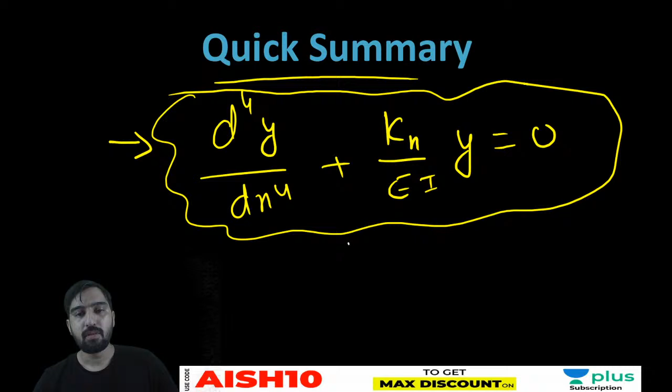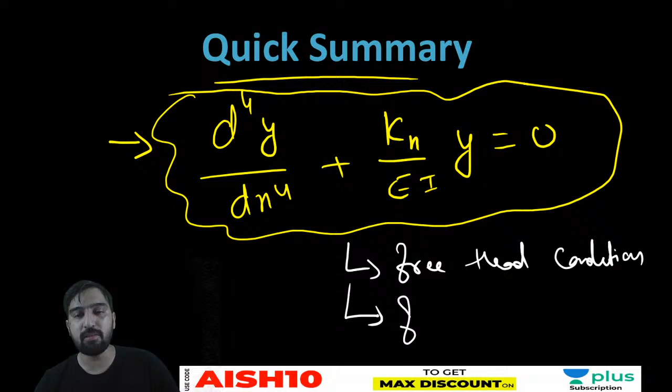What are the cases? We have to discuss two cases. First, free head condition, which I covered yesterday in quite a detailed way, slowly. And the second one is fixed head condition. So my target is to cover these two in today's session.

Okay, yes, so it is like that. So today I am going to start from this differential equation and the solution to this differential equation, which is obtained from the strength of material concept.

The solution to this differential equation is going to tell you all the things about the pile, like deflection, slope, bending, shear, reaction. So all these things you can obtain by using this. It is KH, so both the notations are used, KH as well as KS. So I will use KH from now onwards.

Okay, yes Shashi, tomorrow you can enjoy my structure lesson, don't worry. Okay, so Rupinder ji, we are doing well, you tell me.

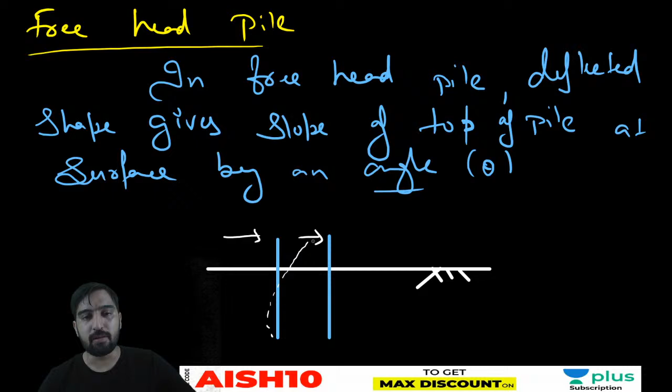As you can see here, deflection is there, and along with that you will also be having some slope, let's say theta. Okay, so this is a case which we want to analyze. Is it clear? Okay, so how we are going to analyze it, we have to see that.

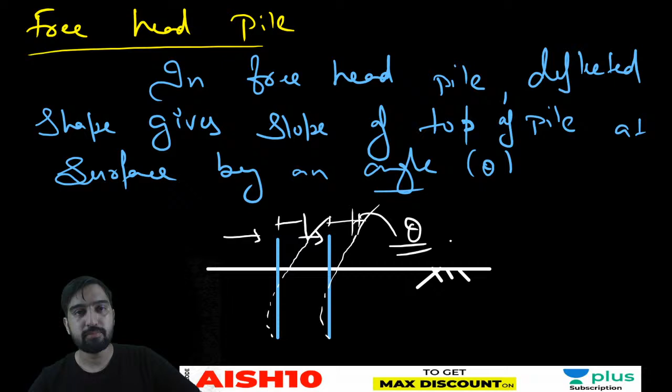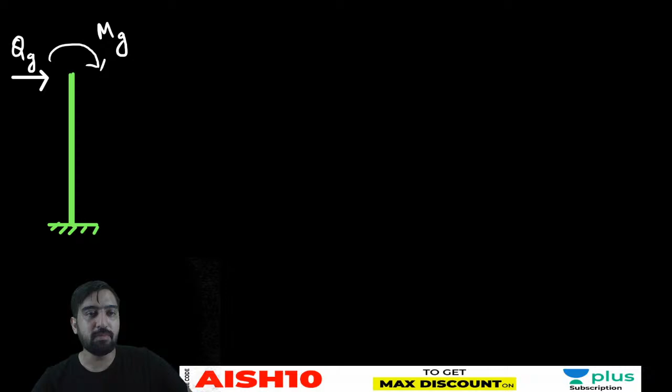So we will use the principle of superposition. Suppose this is my pile, which may be subjected to lateral load and moment. Let me call this moment as Mg and this lateral load as Qg. Okay, and this is ground level, so I cannot keep it fixed, let's say it is ground level.

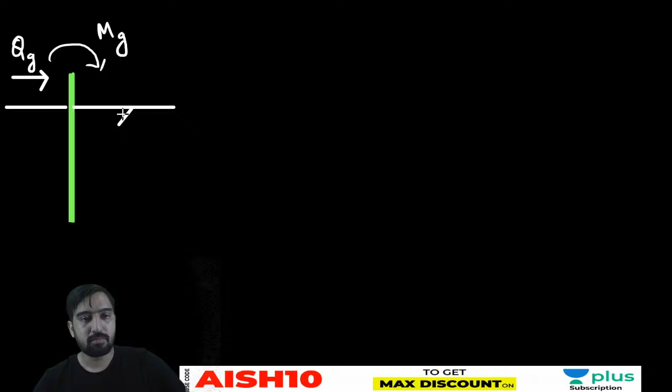So my dear friends, what I'm going to do here is break this loading into two components. First one, I'm going to tackle only lateral load, and in the second case, I'm going to show only this moment. This moment may have originated from the axial loading due to the eccentricity of the axial loading. So what I'm going to do here is simply divide this configuration into two parts. Okay, let me show them one by one.

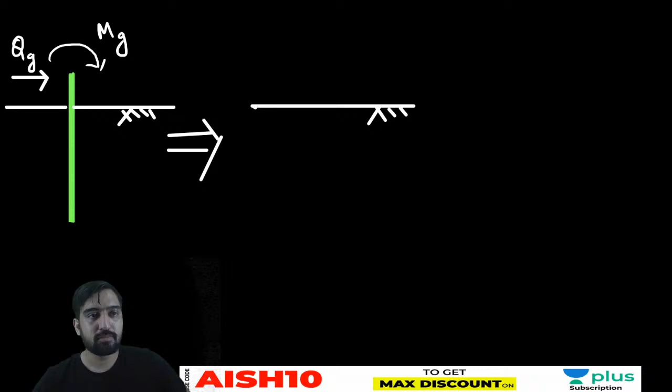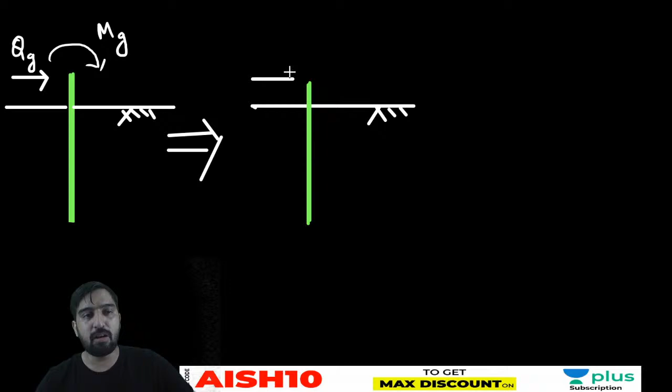So first portion is this one, in which only lateral loads are considered. Okay, and second, plus second component is this one, where only moments are considered.

Is it clear, my dear friends? So second portion is going to have only moment, and let's say it is Mg.

Okay, so now what is the principle of superposition saying? The principle of superposition says whether I'm going to take both of these forces together, or consider them independently and then add them, both are going to give the same result in an elastic material. And it is our assumption that the pile is long, and a long pile will be considered as an elastic pile. And these deformations are considered small in comparison to the dimension of the pile.

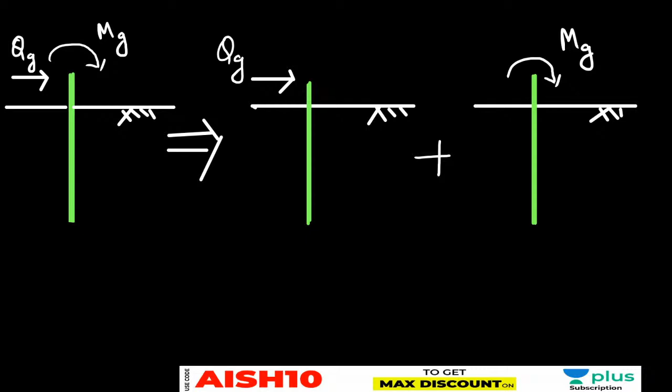Okay, so now what I want to tell you, if you want to know the deflection here, let's try to understand this thing. Suppose you need this deflection, let me call it y. So this is the combination of this one and this one.

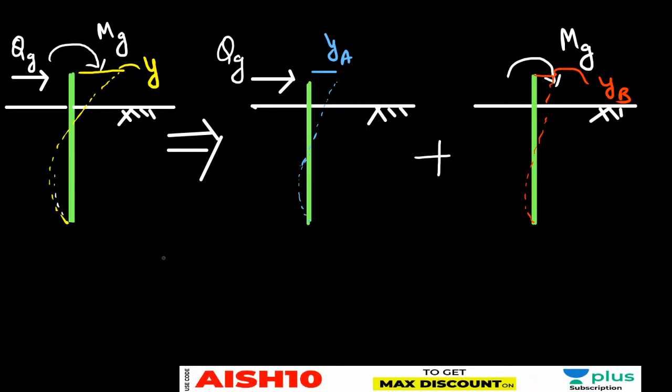So if this is known as ya, and if this is known as yb, then the total y is equal to ya plus yb.

Ya plus yb. This is superposition - that this independent deflection at a distance x from top, if you add them up, you get the final deflection.

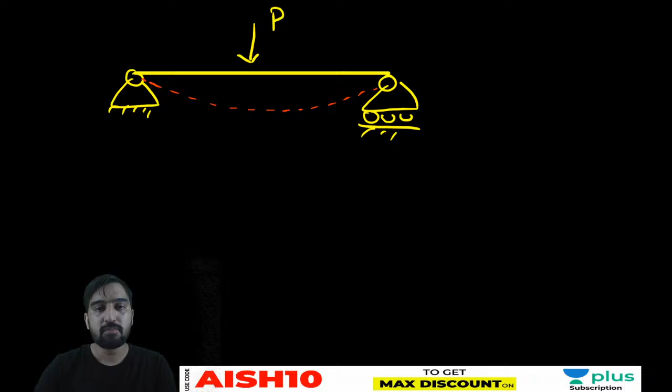And you are applying here a point load at the center, let's say P. So the deflection due to this at center is PL cube upon 48 EI, and the slope here is equal to - how much is it? It is PL square upon 16 EI, I guess - whatever it is, check it.

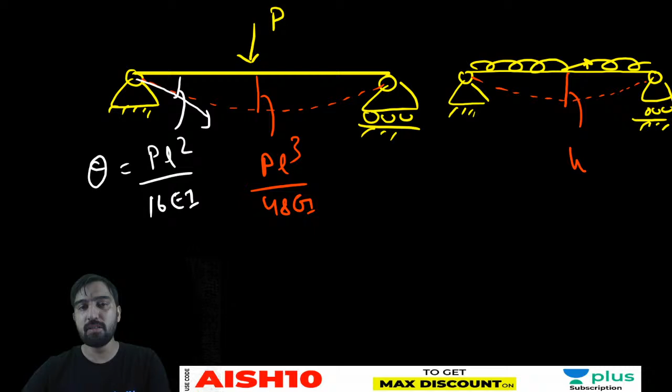Now what did I do next? I am applying some other load here, let's say UDL. So due to this, what is the deflected pattern? The deflected pattern is like this, and let's say this deflection is 5WL4 upon 384 EI, and let's say this slope is WL cube upon 24 EI. Okay, let's assume this.

So now when both of these forces act together, when both of these forces act together - what are those forces? This UDL as well as this P. So now, you only tell me what would be the end slope. What would be the end slope now? Theta - theta would be what?

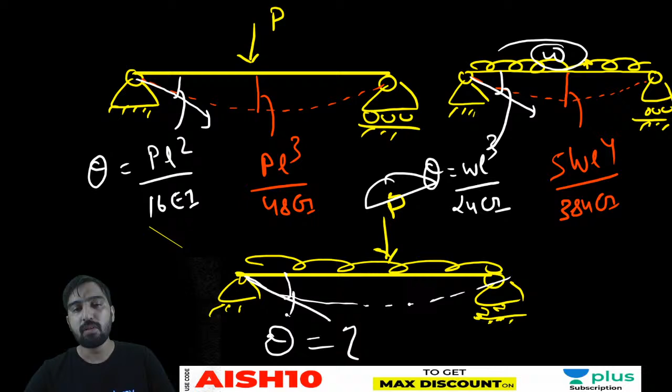Please tell me this - so will it not be equal to theta due to P as well as theta due to UDL W? So you have to write theta here will be equal to PL square upon 16 EI plus WL cube upon 24 EI.

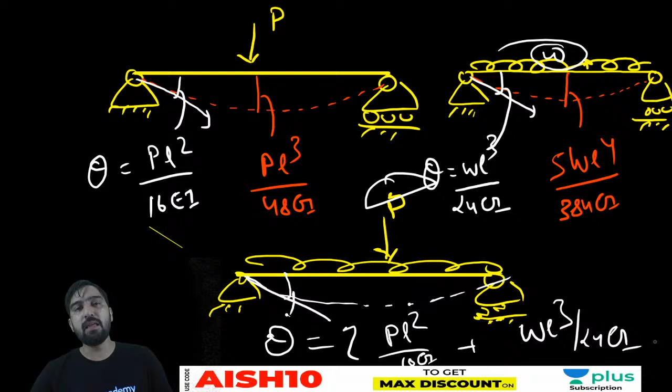So similarly here as well, I have written that slope at any distance x from the top is equal to slope here as well as plus slope here. So SA is the component of slope due to the lateral load action, whereas SB is the component of slope due to the moment action.

Okay, so this is what I want to tell. Not only slope and deflection, but other than slope and deflection, your moment, your shear, your reactions, each and everything will get superimposed. So what I want to say, the crux point here is, deflection at any distance x would be equal to A plus B.

So A and B are not representing only the top deflection, it is a general one. So I'm intentionally removing this x sign. Don't think only top values are YA and YB. YA is variable only, YB is variable only. So YB is variable for this pile, YA is variable for this pile, and Y is overall variable. And here by X I am representing distance X, from the ground level.

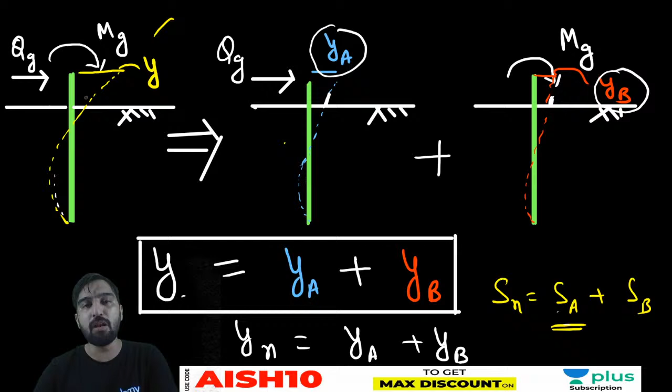So if Yx is equal to Ya plus Yb, in that case, my dear friend, tell me what can I write for slope? So it is also equal to Sa plus Sb. Similarly, what about moment? Mx is also equal to Ma plus Mb. Similarly, shear force at any distance x is also equal to Va plus Vb. So like that.

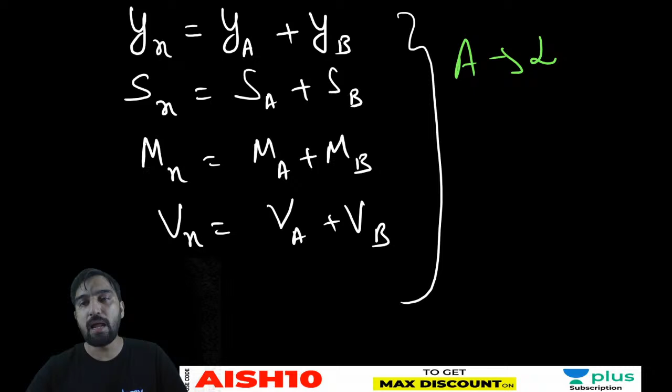So basically A is taking care of lateral load, and B is taking care of moment, because that moment is also causing slope and deflection in the lateral direction.

Is it clear to all, my dear? Please let me know if you are having any doubt till here. Okay, is it clear to all? Tell me, is it clear to all? Okay.

Now see here. I would like to start with the deflection. So Yx, I have learned that it is equal to Ya plus Yb.

Okay, now what we have seen here, that your Y is a function of x. What is x? X is distance from the ground level, or from the top of the pile. Length of the pile, what is the total length of the pile? On that value as well, Y is depending. If length of the pile is more, deflections may be large, and if length of the pile is less, it may act as a rigid pile and deflections may be small. T I am going to explain later.

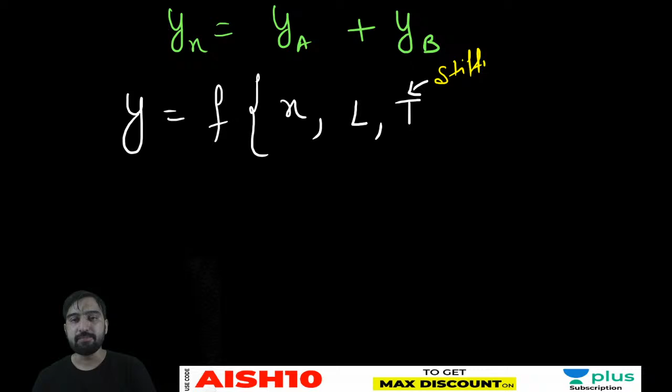At the end I am going to explain T, but yes, you can call it the stiffness factor. It depends upon soil, it depends upon Young's modulus of pile, it depends upon the geometric property. So on these three parameters, your stiffness factor is dependent. Meaning it is taking care about the soil as well as about the material as well as the geometry of the material. So T here is known as the stiffness factor, and its exact formulation I am going to explain you at the end, because that is a process of derivation. I am going to tell what is T, experiment formula wise.

Okay, it depends upon KH. I hope you all know what is KH. It is depending upon EI. It is depending upon QG. QG is lateral load, and it is depending upon MG. So total you can say your deflection is going to depend upon 7 parameters.

X, total length, stiffness factor, KH, EI, Young's modulus and moment of inertia, QG and MG. If you are considering EI as a single quantity, flexural rigidity, then you can make it one. Or if you want to further bifurcate them into two parts, then you can say this Y is a function of 8 things: X, L, T, K, H, E, then I, then QG, then MG.

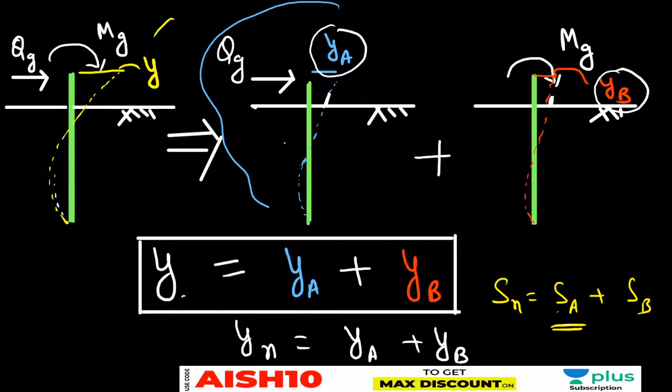Similarly, if YA is taking care of QG only, you know what YA is - it is only due to the QG thing. Similarly, YB is going to take care of the MG thing.

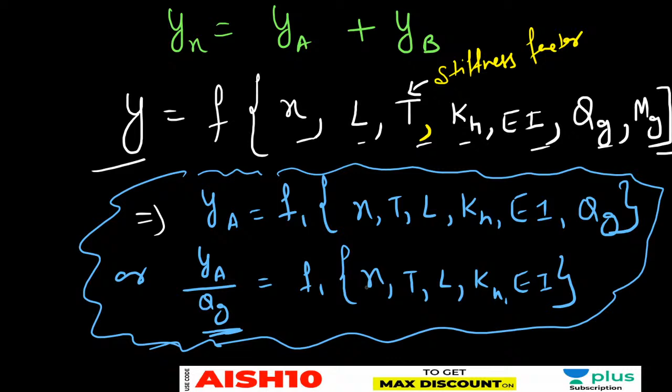So here you can see that YB is a function of X, T, L, K, H, EI, MG. I am applying the superposition principle. First time I am only considering QG as a load, and second time I am considering only MG as a load. So as I told you, Y here is only MG to be considered. Is it clear?

Okay, good. I hope it is clear.

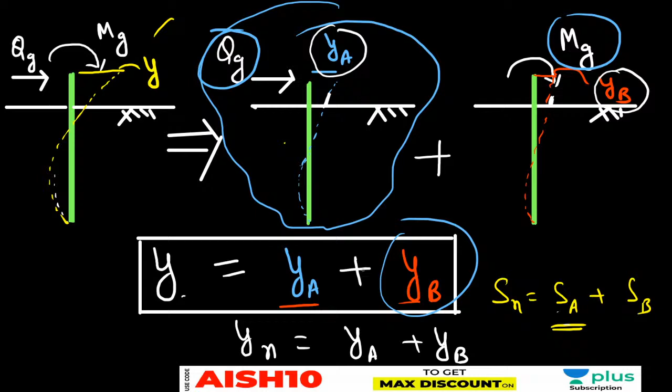So when I am writing YA, QG is considered. When I am writing YB, only MG is considered. That is why I am bifurcating them. So YB upon MG is a function of X, T, L, K, H and EI.

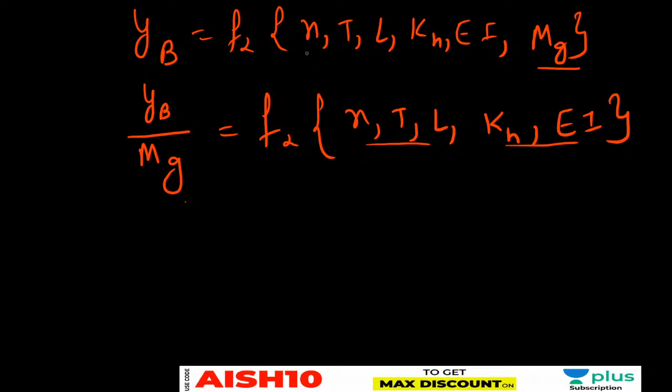Is it clear to all? So now I can say terms 1, 2, 3, 4, 5 and 6 are this. So YB is a function of these 1, 2, 3, 4, 5, 6 terms. Similarly, YA is also a function of 6 terms. Out of these combinations, one combination is this and one combination is this.

So if you are trying to find the dimensionless terms, you will be getting 4 dimensionless terms. So 4 independent non-dimensional terms can be determined. So what are those 4 independent non-dimensional terms?

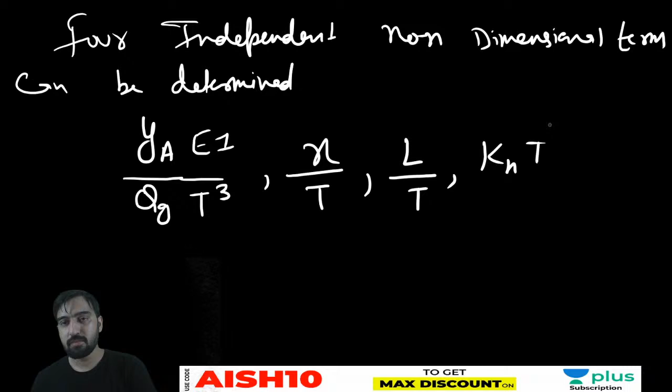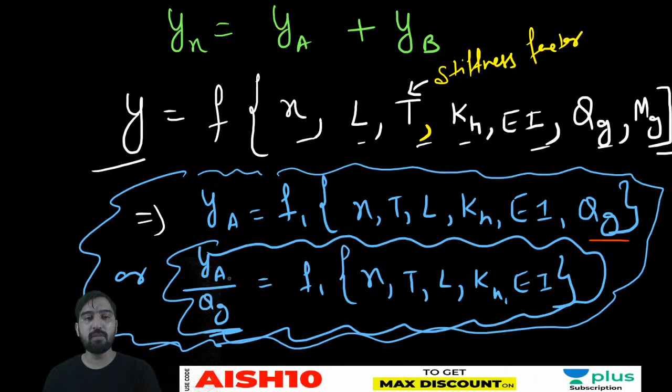So if I am solving them by using the Buckingham Pi method, these are known as 4 non-dimensional terms, and these terms are also known as Reese and Matlock's non-dimensional parameters. Is it clear to all, my dear friend?

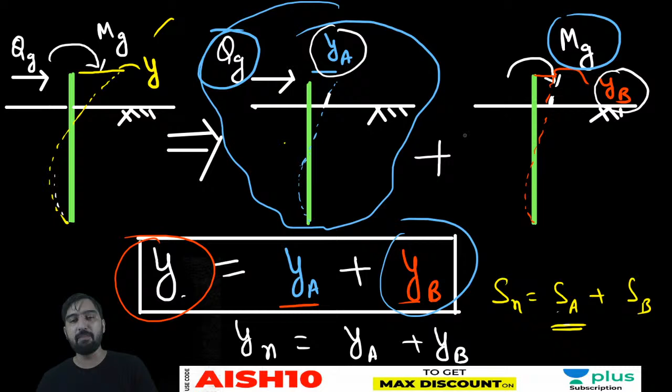I am going to tell you the analogy. See, it is a dimensional term, you can even find it. I will suggest you, if you know Buckingham Pi and all, try to define these. Just study 2 to 3 times, watch this lecture twice, or read these notes whatever I'm giving you, 2 times, you will remember all the things. Now I'm giving you some technique, try to relate it with the structure and the basics of strength of material, so it will be very helpful for you. I myself am going to tell you how I keep them remembered.

X is the variable depth with respect to ground level, and when X is equal to X max, it will be equal to length, and this is known as your total length. It is known as Z max, and it is known as your Z only. So this blue thing is taking care of QG, and this red thing is taking care of the moment thing.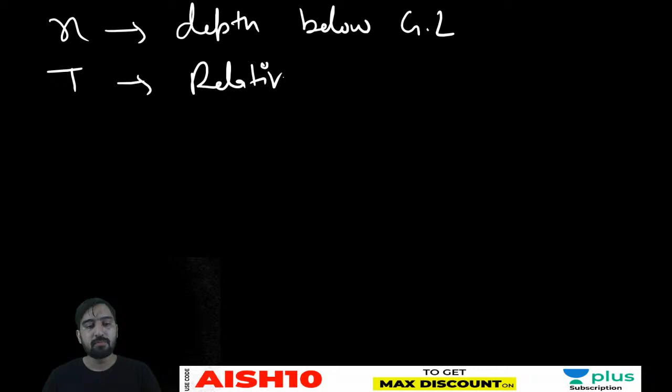So let me explain this terminology one more time. X is basically, my dear friend, the depth below the ground level. T is relative stiffness factor, and I'm going to define it later. Right now I have told you it depends upon the soil, it depends upon the material. So L is the total length of the pile.

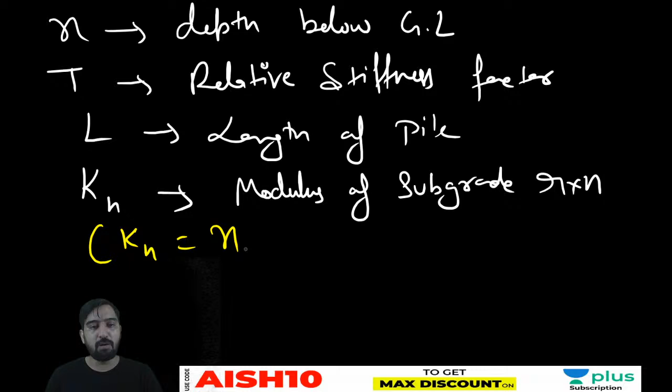Now what was next? X, T, L, and this KH you all know. KH is, you can say, it is modulus of subgrade reaction. And you remember KH we have also written as KH equal to NH into X. And what was this NH? This NH was equal to constant of subgrade reaction.

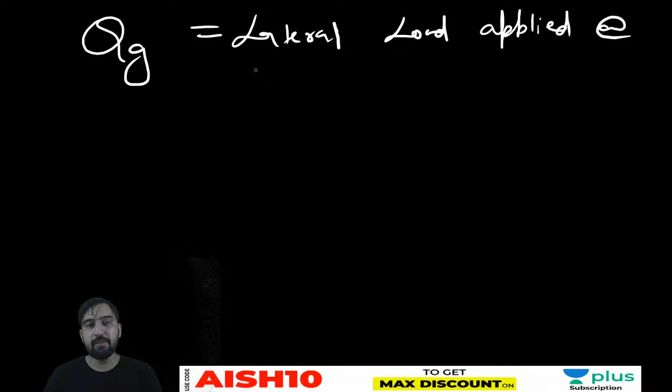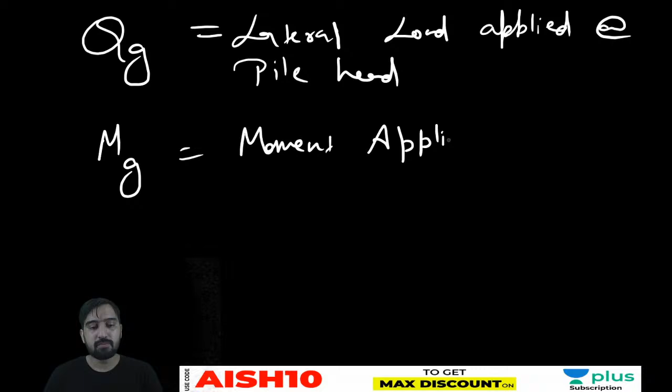Okay, so after that EI is flexural rigidity of pile. The spelling is slightly wrong, check it. And QG is lateral load applied at pile head, and MG is moment applied at pile head.

So once again I have explained all the terms. These are the terminology: X, L, T, KH, EI, QG, MG. I have broken this function into two parts. One is taking care of QG only, and another is going to take care of MG only, so it is known as YB. So Y is equal to YA plus YB. Is it clear to you?

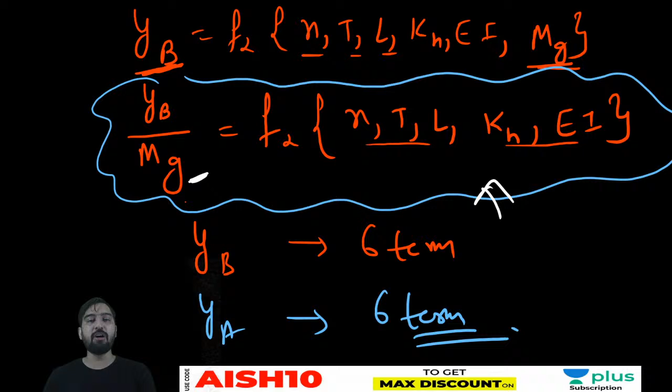So YA is taking care of QG, YB is taking care of MG. Based on this analysis YA and YB, total 5 dimensionless parameters have been originated: first, second, third, fourth, and fifth. This fifth one, the only difference is QG and MG, so simply substitute QG into T by MG, so it is the fifth dimensionless term. Now see my dear friend.

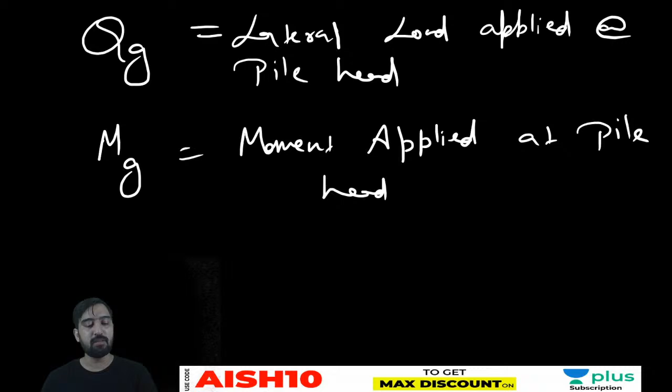What can we do further? It is very important to know. I keep telling you one thing, that here the elastic deflection is small as compared to pile dimension, and for such cases, the principle of superposition we can use easily. So you know that YA, what was the first term? YA is EI upon QG T cube.

YA, EI upon Qg T cube. I am assigning it with the Ay.

Similarly, I will tell you what are these things. YB: EI upon Mg. See, dimension of Mg is higher than that of Qg. So Qg into T, let's assume Mg. I am not saying Mg is equal to Qg into T, please remember. But dimension-wise, I can say the dimension of moment is one higher than that of load. So just assume Q into T as Mg. In reality, the responsible for this moment may be some axial load, maybe some inclined load. So this is By.

Now my dear friends, listen to me very carefully. Here Ay is the constant which is telling you about the deflection. Here By is some constant which is also telling you about the constant. So Ay is going to tell you the constant due to this lateral loading, and By is going to tell you the constant due to this moment, due to this couple. Is it clear? So I am denoting this Ay and By here, let me keep other parameters here as well.

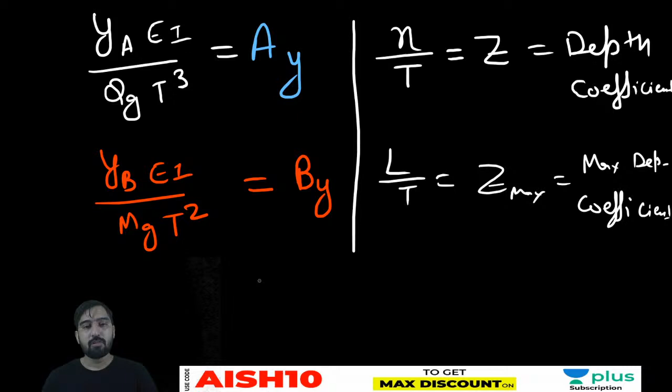So Kh T4 upon EI, it is known as soil modulus function. See, soil modulus, it is taking care of soil and it is taking care of pile material. So it is denoted by phi x.

Okay, now once again I am repeating. After seeing these dimensionless terms, I have five independent terminologies. The first term I am denoting with Ay. The fifth term I am denoting with By. It is due to lateral load and it is due to moment. This term x by t is taking care of any arbitrary distance x from the ground level, and I am calling it depth factor, which is nothing but Z. L by t you can call the maximum depth factor. Is it clear to all my dear friends?

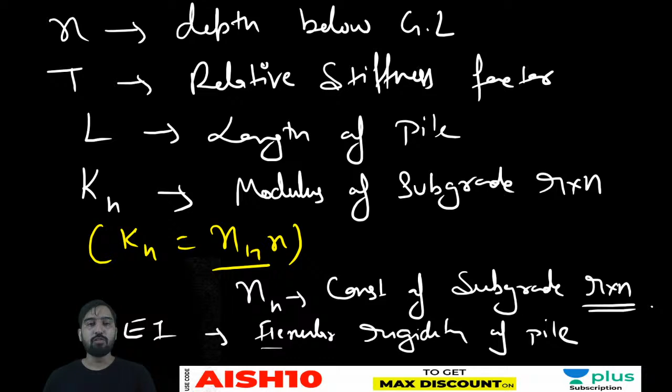So based on these five terminologies—first, second, third, fourth and fifth—I will be able to completely analyze, you can say, free head condition as well as fixed head condition. Okay, so now, I'm starting from that point where I left yesterday.

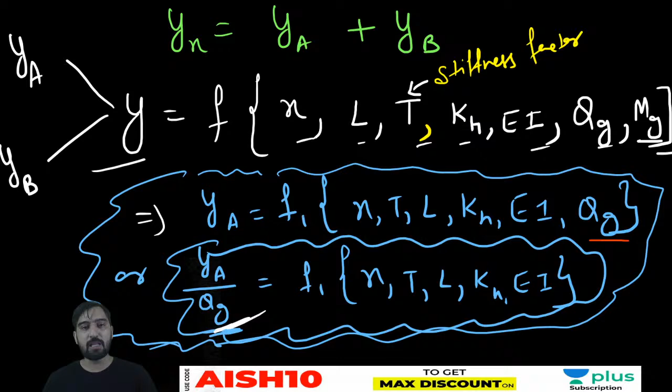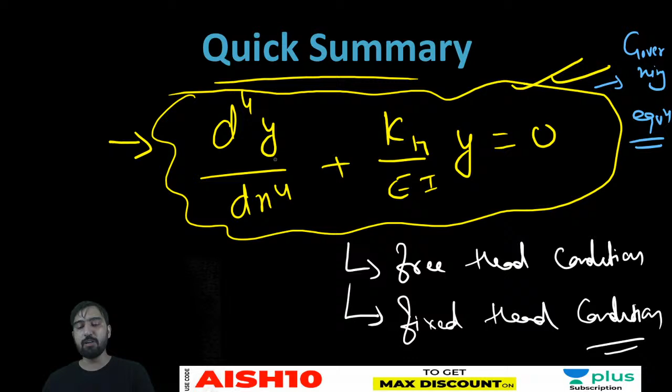So we all know what is the differential equation involved here. So what is the differential equation here? The differential equation was d4y upon dx4 plus khy upon EI is equal to 0. Is it clear? So it is also true for the differential equation of deflection due to lateral load as well as due to moment. Is it clear to all? So it is true for each and every condition.

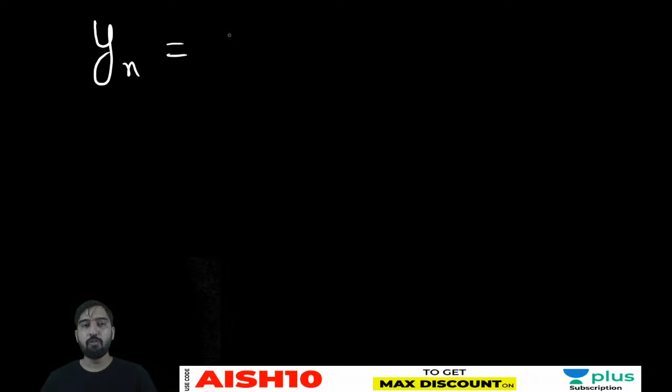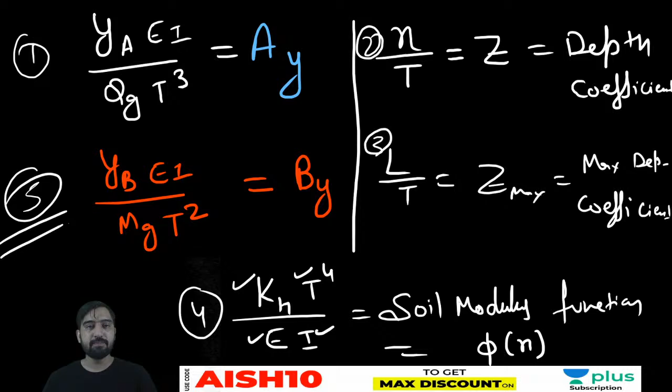So from here, my dear friends, you can also say, now listen to me very carefully: Yx is equal to Ya plus Yb. What is Ya? If I want to write Ya here, it will be Qg T cube upon EI into Ay, plus what is Yb here: Mg T square upon EI into By.

Mg T square upon EI into By. So the general value of deflection at any point depends upon these two constants Ay and By. Reese and Matlock have obtained this constant at various depths. You can change the depth accordingly, and the value of Ay and By will also get changed.

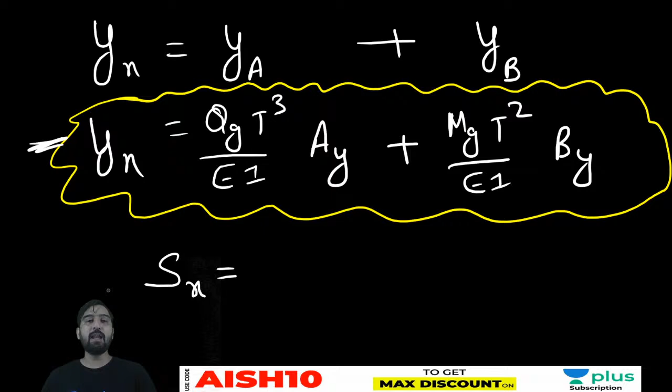Not only this, similarly if you want to write the expression for slope, let's say Sx at any distance x from the ground level, the slope is. So how can you remember the term? Like, it is slope and it is deflection, and we all know the degree of deflection is one higher than that of slope.

Let me write here plus mg into t, with 1 degree reduced. So this is slope and this is deflection. This is slope and this is deflection.

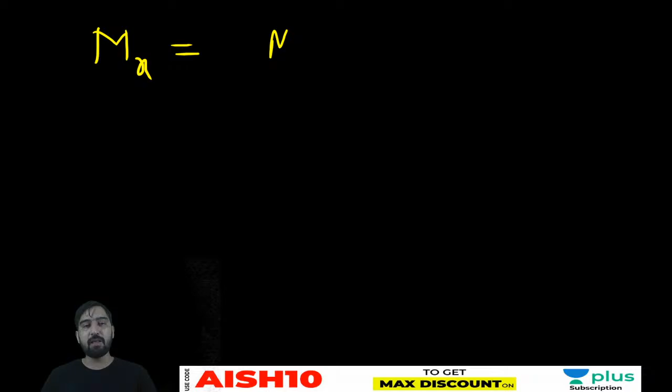Now can somebody help me decide what should be the similar equation for moment? So similarly, if I want to write the relation for moment, we know that the stiffness of the material is not going to play any role. So if I want to write the general expression for bending moment at any distance x from the ground level, it will be equal to Ma plus Mb. Ma is simply Qg into t, with coefficient a, and Mb is due to Mg into b. So this is due to bending.

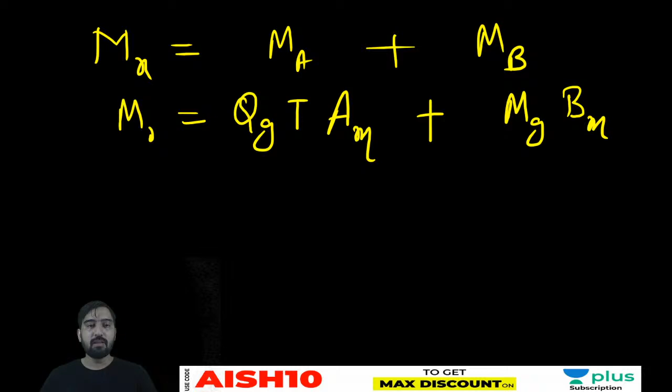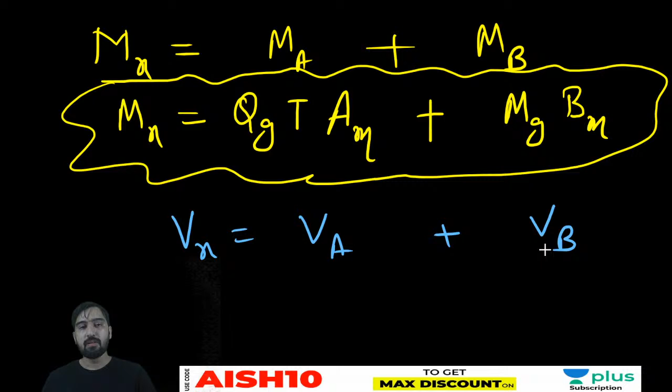Similarly, if somebody wants to write it for shear, then for shear, Vx at any distance is equal to Va plus Vb. Va is equal to Qg into Av, and Vb is due to moment, so dimension is to be reduced by 1. Qg into AV has dimension of kilonewton. Mg has a dimension of kilonewton meter, so it is Mg by T.

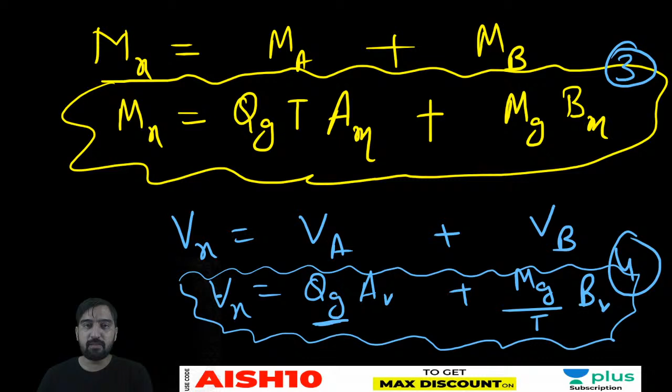So total 5 expressions are there now. First one, second one, third one, fourth one. So let's write one more time. Let me write this time for soil reaction.

So it is Px is equal to Pa plus Pb. So what is going to happen here? Reduce degree by one more time. So Pa is Qg by T, and Pb, it is Mg by T square. So it is the soil reaction, my fifth expression.

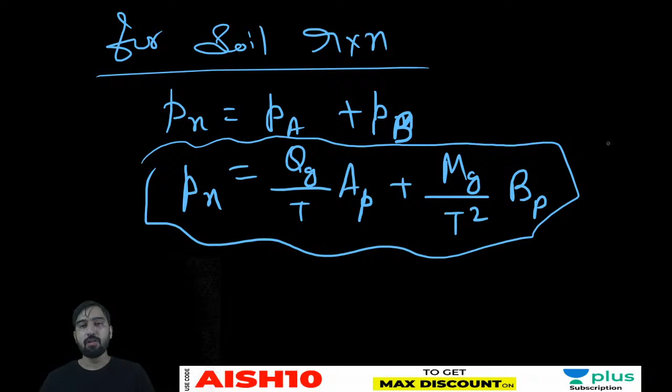So let me rewrite all this one more time so that you guys will be confident how to write all this. First expression I have written in terms of y, is ya plus yb. So how have I written it? This a portion is Qg T cube upon EI.

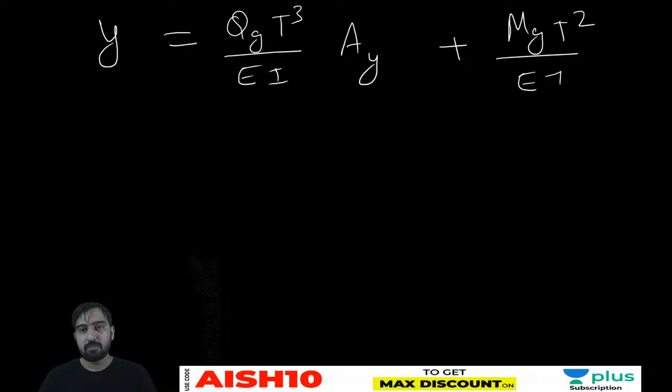See how to read the subscript. A stands for Qg and B stands for Mg. Y stands for this, so this is deflection. So Y means lateral load coefficient for deflection due to moment, and lateral load coefficient for deflection due to lateral load.

Second is slope. So reduce degree by one time.

Third one I have written is moment: QGT into AM plus Mg into BM. Fourth one was shear.

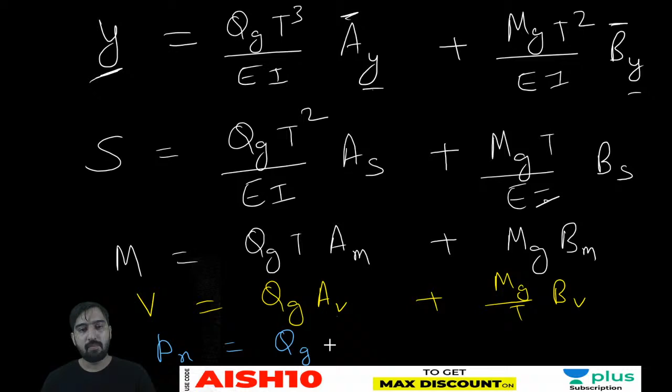QG into AV, V stands for shear, plus Mg by T into BV for moment shear. And last one was Px: QG by T into AP plus Mg by T square into BP, sorry, AP.

So, very easy to learn, if you are knowing all these things. Tomorrow I will tell you how to get these values: AY, AS, AM, AV, AP, BP, BV, BM, BS, BY. So after that, the analysis has been completed.

Is it clear? On Monday we will see how to find these coefficients. These are tabulated by Matlock. So on what basis have they tabulated it?

What do you understand by analysis? By analysis you mean to know the deflection, the slope, the bending moment, the shear force, the subgrade reactions, and the soil reaction at different depths of the pile. Once you know all these things, the analysis is completed, and you will be able to calculate all these values once these coefficients are known to you.

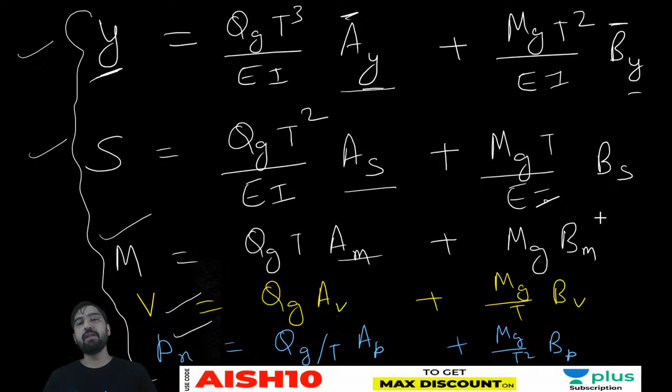I will tell you on Monday how to obtain these coefficients, and I hope these expressions are quite easy to remember, just like slope and deflection in your strength of materials, which you can visualize on a structure. Like M upon EI diagram area: bending moment is bending moment only, shear force is one degree less than moment, and reaction is again one degree less than shear force. So all follow a single pattern.

So it is a complete analysis, but too many crux points are yet to be discussed. First, I will tell you what is AY, BY, AS, BS. For that, I am going to show you a table in Monday's class, and then I will give you one or two numericals so that each one of you will be comfortable with this.

So, one more session on laterally loaded piles. After that, from Tuesday onward, I am going to start pile group efficiency. Is it clear? Is it clear?

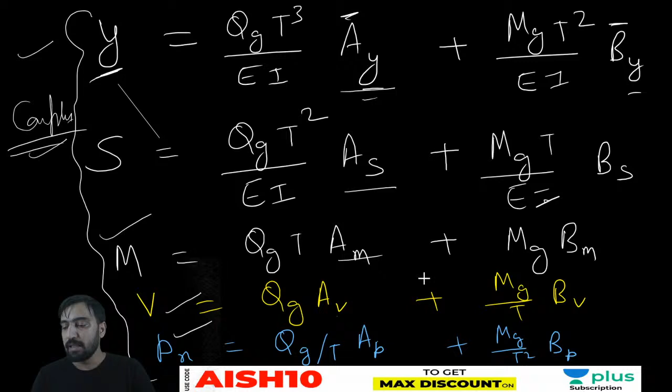Okay, great. Mohammed Kaif, sorry if you are not understanding. So it's my humble request, go through lecture 1 as you are saying you are late today. Just see the lecture from the beginning. If it is not clear, then I can give you some time on Monday's class. Okay, MD Kaif, Mohammed Kaif.

Okay, Shashi, sure, not in today's one, my dear friend. The one which you sent me two days earlier, in that I told you it was a little wrong. Today's one is perfectly right. I have not checked all of today's, but two days earlier, whatever you told, there is some flaw in that. Okay, I have already extended the session.

So your next class is at 6, Geotechnical Engineering, and Abhishek sir is teaching you shear strength of soil. So guys, please go through this lecture, please revise this lecture. And we will be meeting for Geotech again on Monday, 4:30 to 5:30.